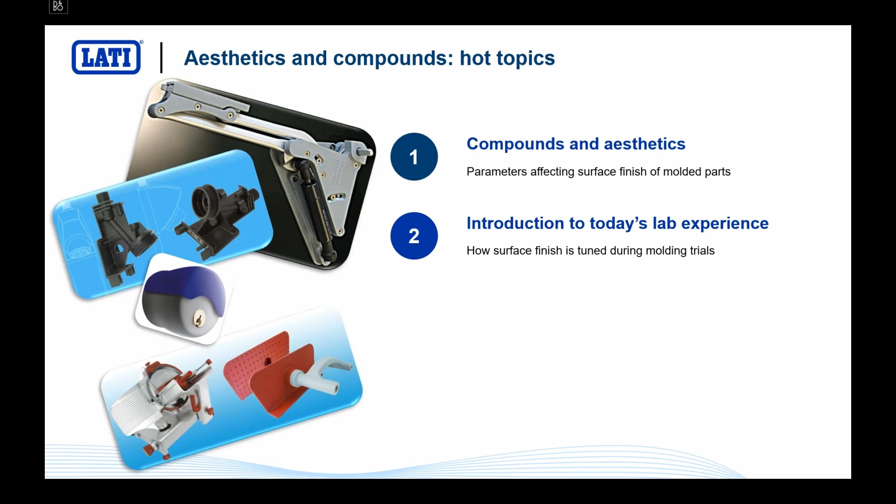How did we develop this very tricky topic? We wanted to create a lab experience and the design of experiment. So we are going to introduce the topic in itself and see what are the parameters affecting the formula and injection molding, and how we will discuss the quality of the surface finish and aesthetics with the molding design of experiment. So we were going to actually play with this topic by fine-tuning some parameters in the formula and in the injection molding process.

We will conclude our webinar with a wrap-up, trying to better understand how it is possible to make technical compounds, injection molding, and all the parameters working in both fields, injection molding and plastic formula.

First of all, we have to try to define what is aesthetic. It turns out that we talk about aesthetics even when we are talking about technical plastics. Technical plastics are normally not conceived for fashionable applications. So why are we talking about aesthetics and technical plastics? Because even when we're working with technical plastics, we are having issues with surface finish and how parts appear. We need to have a perception of a finely working and perfectly working, finely molded part. And it is absolutely very important to keep an eye on the aesthetics and surface finish, even with the most complicated and the most high-performant compound.

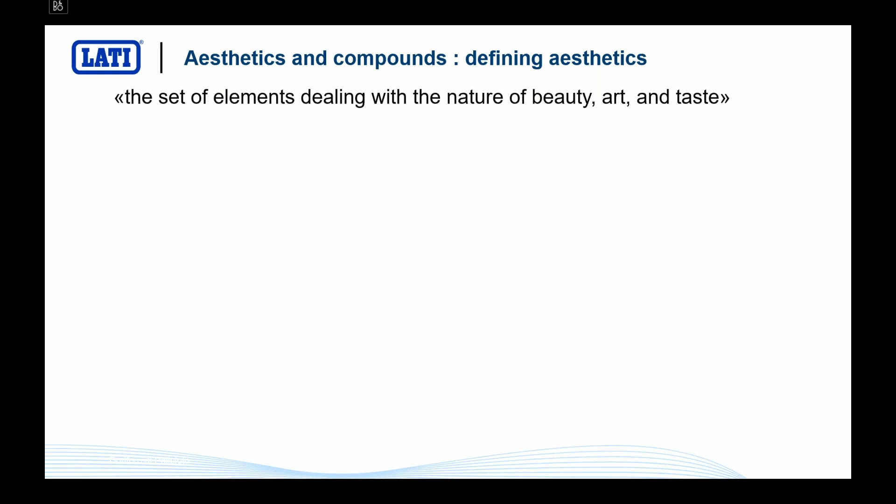So if we want to define aesthetic, it's a bit philosophical, but aesthetics is defined as the set of elements dealing with the nature of beauty, art, and taste. So you read no plastics in this sentence, but beauty, art, and taste.

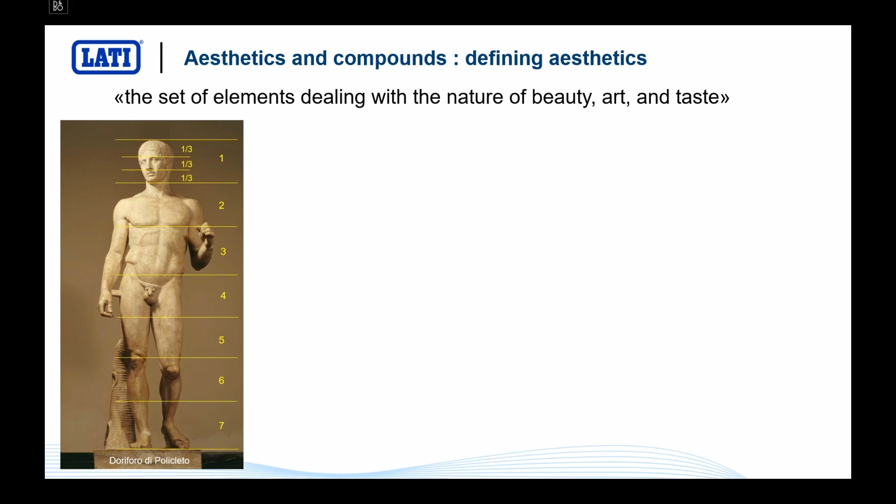I want to play it big, so I introduced this picture of this nice statue. Why did I do this? Because the search for beauty has always been in the mind of man since the early ages of our civilization. Beauty is a very tricky mixture of different perceptions. You see how this statue is actually made out of different materials and the different proportions between the parts of this body. How do we perceive, how do we feel beauty and aesthetics?

First of all, we see it with a visual perception. So we will appreciate a smooth and uniform appearance, just to give you an idea. Or with our tactile perception. For this reason, we will appreciate a smooth feeling on a glossy surface and a rough feeling on a rough surface. And we will not appreciate any roughness on a glossy surface or any glossy area on a rough surface.

Last but not least, we must not forget the olfactory perception. If you have the most beautiful looking piece of engineering, but it smells bad, then you will have a bad perception of that very part.

All these nasty issues with the perception of beauty can be summarized in the plastic part showing up here. You see how this part can be absolutely perfectly performing, can work perfectly great, and injection molded with the most performing technical compound, but it looks bad. It looks poorly molded, it looks full of streaks, the color is not even, the surface is rough and not glossy. You have the perception of a bad looking part, but you also have the perception of a poor and poorly working part. And this must be absolutely avoided when it comes to technical compounds.

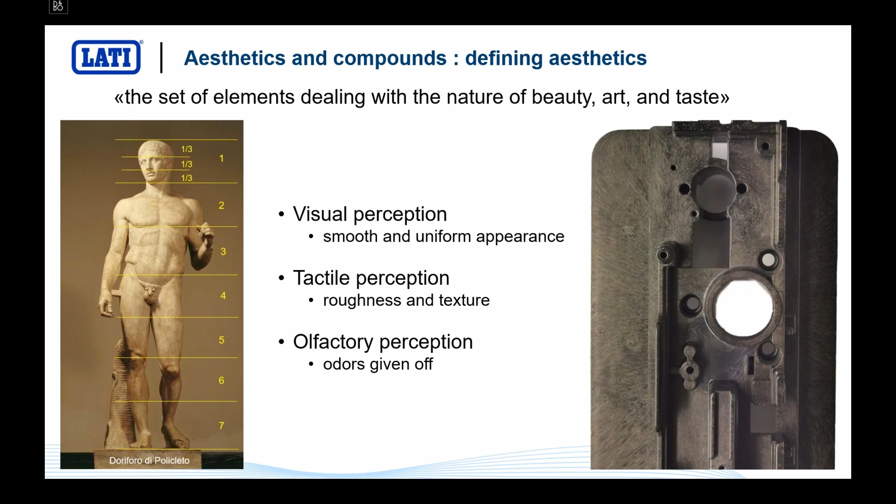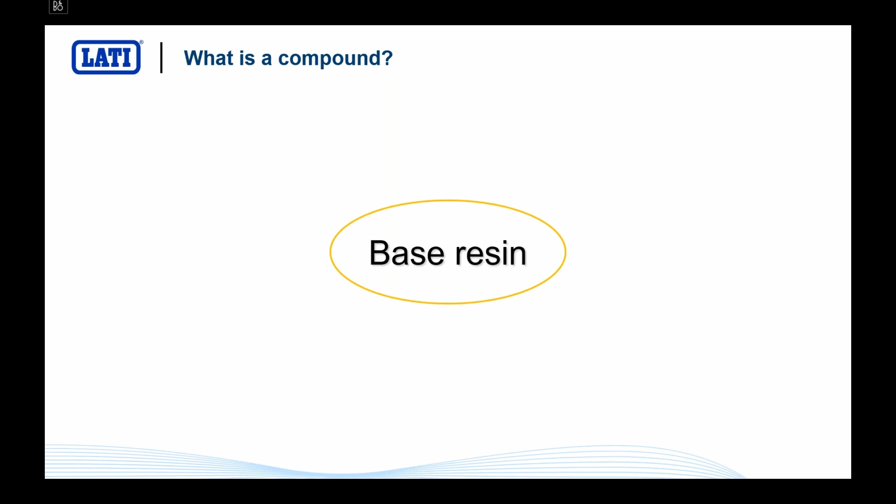Now let's see what is a compound. We have already been talking about this quite a number of times, but it is important to talk about what is a compound even from an aesthetic point of view. A compound is a mixture between a base resin, which is the polymer, which is the plastic in itself actually, and a set of additives that we put into this plastic matrix to achieve some specific performances.

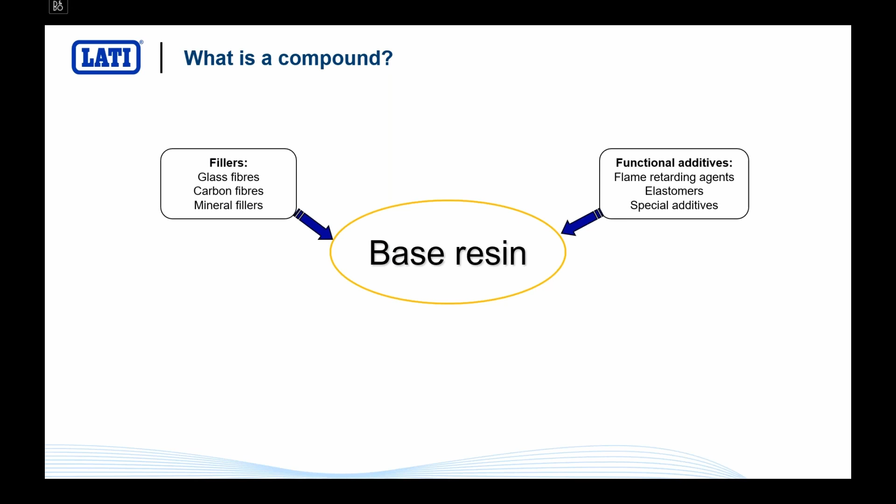First of all, functional additives, talking about flame retarding agents or self-lubricant agents or thermally conductive agents and so on. Then you have fillers providing dimensional stability and mechanical properties like glass fibers, carbon fibers, mineral fillers, and we will see some of them during this webinar.

Then you have plenty of processing aids. Compounding, extrusion, calendering, and injection molding are extremely demanding processes requiring a lot of processing aids as lubricants, stabilizers, nucleating agents, detaching agents, and you name it. We put plenty of these into our compounds to have a perfectly working plastic.

Then you have stabilizers of any kind. Heat stabilizers, chemical stabilizers, UV stabilizers, thermal stabilizers, you name it. And then, of course, you have pigments and everything providing a good-looking aspect to our plastic.

Colorants, pigments, laser marking additives, printing aids, and so on. When it comes to aesthetics, it's important to keep in mind that each one of these will provide its contribution to the final surface finish of our injection molding part. We have to look for a compromise between performance and surface finish.

Today we are going to have a chat about the effects of different base resins, of different fillers such as mineral fillers and glass fibers. This is the topic that we are going to discuss today.

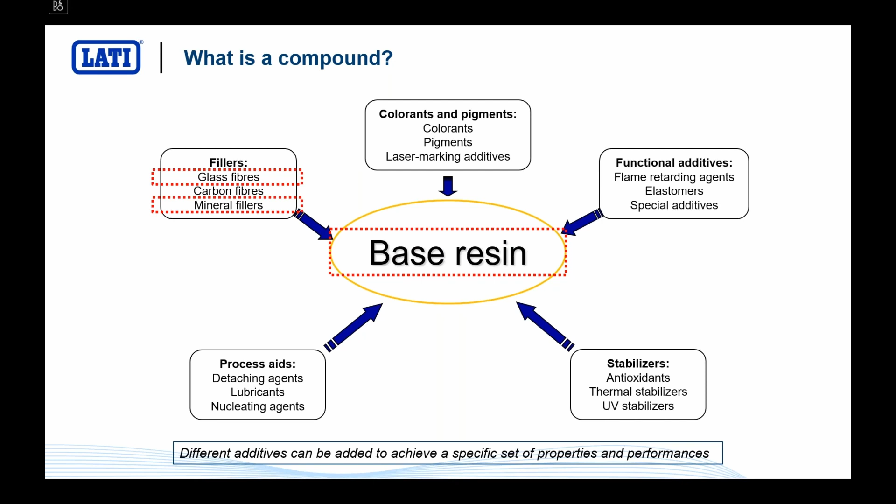We have seen the compound, but what else is also affecting aesthetics in an injection molded piece of plastic? Of course, it's a very complicated process. Even the injection molding process will provide some effects to the surface finish and to the aesthetic quality of our part. First of all, the barrel temperature.

The barrel is where you keep your melt material in the injection molding machine. Then you have the mold temperature, which is the temperature of the tool where you inject your plastic to create your manufactured parts. And then you have the injection speed, which is the speed used to inject melt plastic into the tool. These three parameters are extremely important to achieve the aesthetic level we want to achieve.

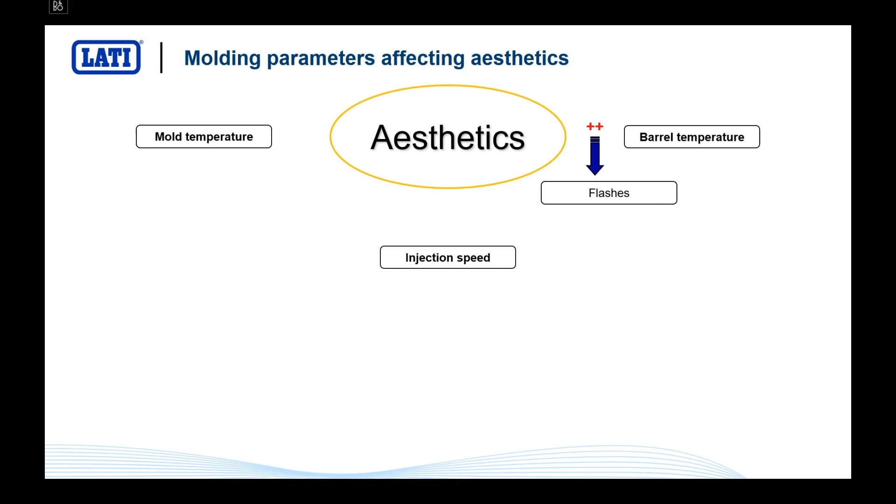What happens if the temperature of the barrel is too high? If the temperature is too high, we will have flashes. It means the plastic will be too liquid and will just be squeezed between the two halves of the tool, or you can actually destroy the material itself.

If the barrel temperature is too low, you run the risk of having a short shot, which is a not completely filled part. And it's absolutely a no-no. You do not want to deal with that.

What happens if you have too high mold temperature? Bad issues. You will have the part sticking to the tool. It will be almost impossible to detach it, even because the shrinkage will be higher and the part will be completely glued to your tool, and you will have issues. Of course, you will have a longer molding cycle because it will take a lot of time to cool down, and that is a problem.

If the mold temperature is low, you have a short shot as well. You can have releasing issues as well, and you can also have other aesthetic issues that we are going to find out during this webinar.

If injection speed is too high, you can run the risk of having flashes, overpacking, or burnt marks. What does injection speed mean? It is the speed that you apply to your melt plastic to fill the cavity. When you apply a high speed, you are also applying very high shear stresses to the polymer, which can actually be destroyed by these stresses.

It becomes more fluid, it can create some gases, you have very bad mechanical performance of the part itself, and you will have an absolutely poorly performing and very bad looking part. So you want to stay away from too high injection speed.

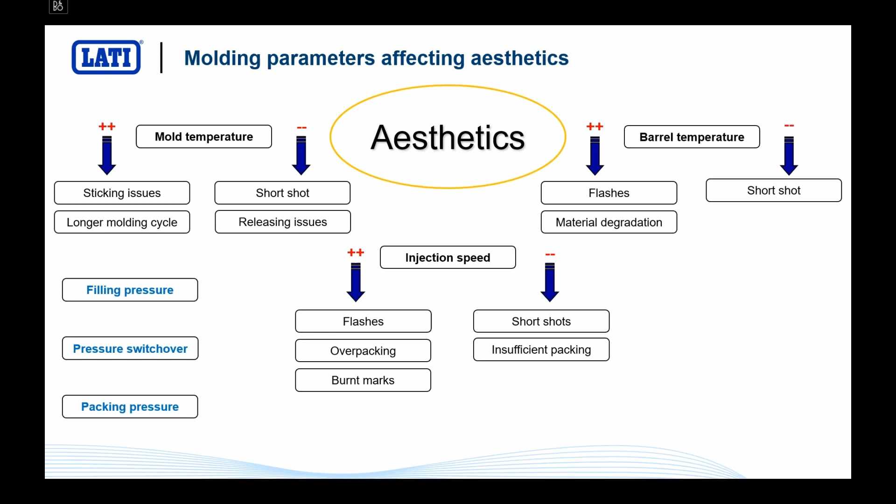The design of experiment that we are going to see today is designed to achieve the best looking, the best aesthetics.

Some other parameters affecting aesthetics: of course, you have injection location and the type of injection. The injection is the part of your molding equipment where material flows through to fill the cavity. It is very important, the place where you put it in your geometry and the shape of your injection system.

Ejector location. Ejectors are the pins used to push the molded part out of the tool. It's very important where you put them because they can leave a sign on the freshly injection molded part.

The color shade is extremely important. We will see that our eyes perceive aesthetics in a completely different way depending on the color of the part itself. Our eyes are extremely sensitive to any kind of defect on dark colors, and more tolerant on light colors or chroma colors like deep blue or deep red. So dark shades are a bad issue when it comes to aesthetics, because even the smallest defect will be immediately detected by our eyes.

Last but not least, the texture. A glossy surface can be extremely difficult to achieve if you want a perfectly looking part, but some coarse or matte surfaces can be tricky as well, especially extremely fine matte surfaces. In that case, even the slightest scratch can really look terrible.

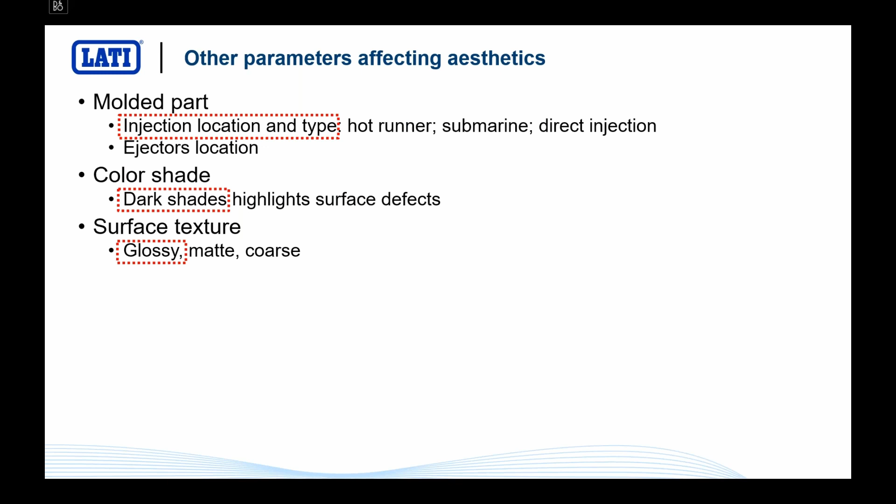We are going to focus our attention on the injection location and type. We will see two different injection setups, only on black parts, because black color is the toughest when it comes to aesthetics and surface finish, and glossy parts, because glossy and dark is the hardest combination when you want to discuss aesthetics and surface finish. Just to give you an idea, I put these two parts below here.

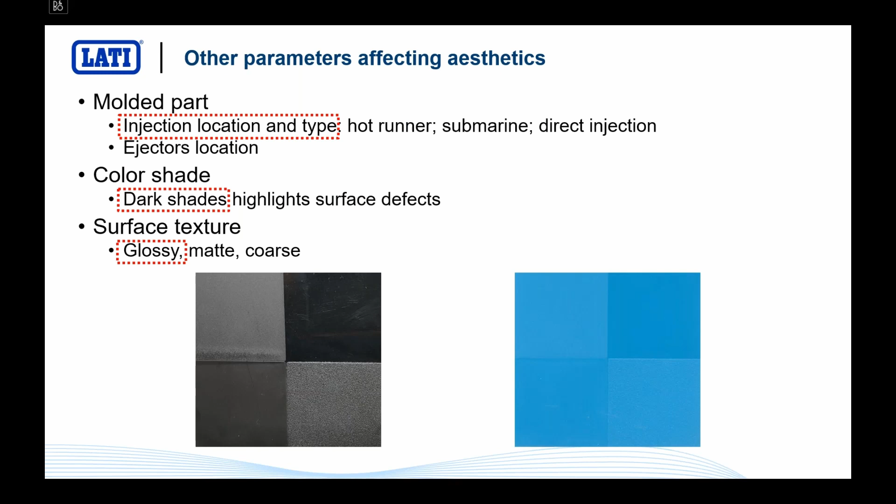They are exactly the same geometry, molded with the same material but with two different colors, and you can perceive how different our sensation is when it comes to color, beauty, and aesthetics. The part on the right seems perfect, the part on the left looks awful, but it's the same material, the same tool, the same injection condition. It is just a different color. So you can easily understand how hard it is to achieve a perfectly looking part.

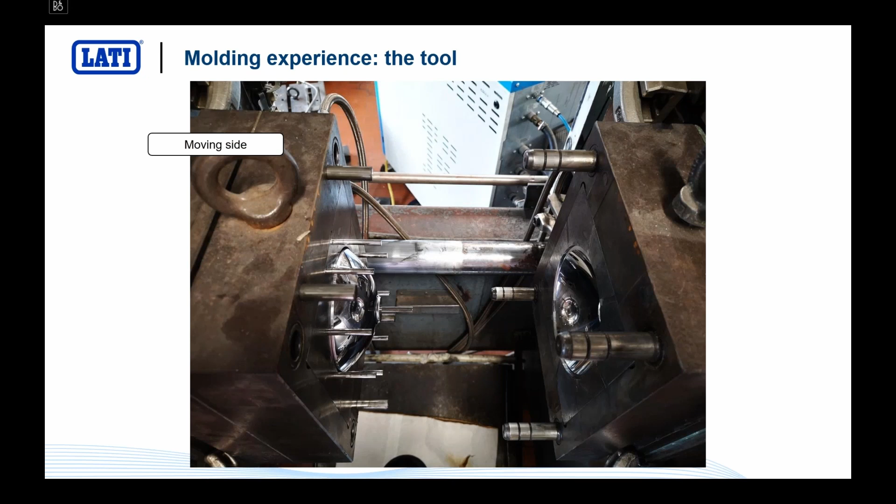Let's talk about the tool that we are going to work with today. It's a kind of bowl, a semi-spherical bowl with a perfectly polished surface. It's a glossy surface. You have the moving side on the left where you put all the ejectors, and you have the fixed side.

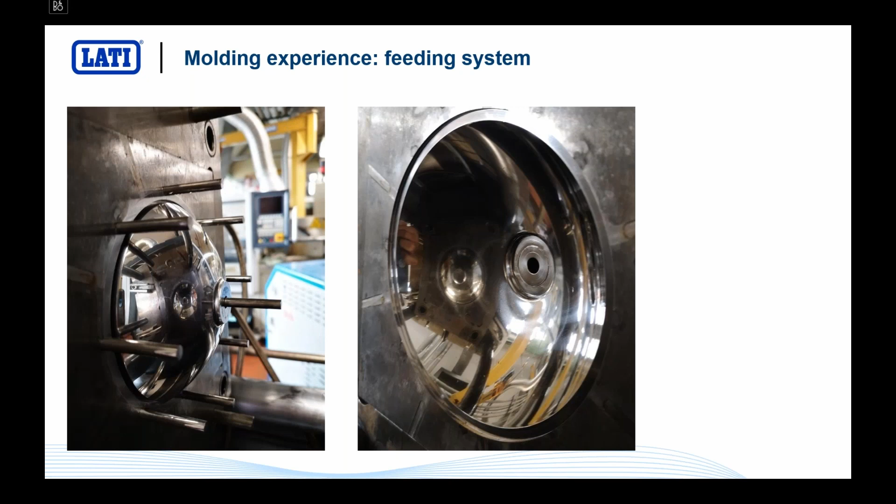Of course, you have two types of injection, as I already said. The first injection type is a fan gate, placed on top of the semi-spherical bowl. The second one is a submarine gate, a 3-gate submarine nozzle. We just change the nozzle and we can simulate the effects of a fan gate and a 3-gate submarine gate. You will see how effective a proper selection of the best injection location and injection type can be.

Now let's start from the very beginning. Let's see how the part can be filled by using a finite element simulation. What you see here is a mold flow simulation. You can see how even the filling path is when it comes to filling this bowl with a fan gate. Everything runs smooth, there are no weld lines, the part is filled like a charm, everything looks perfect.

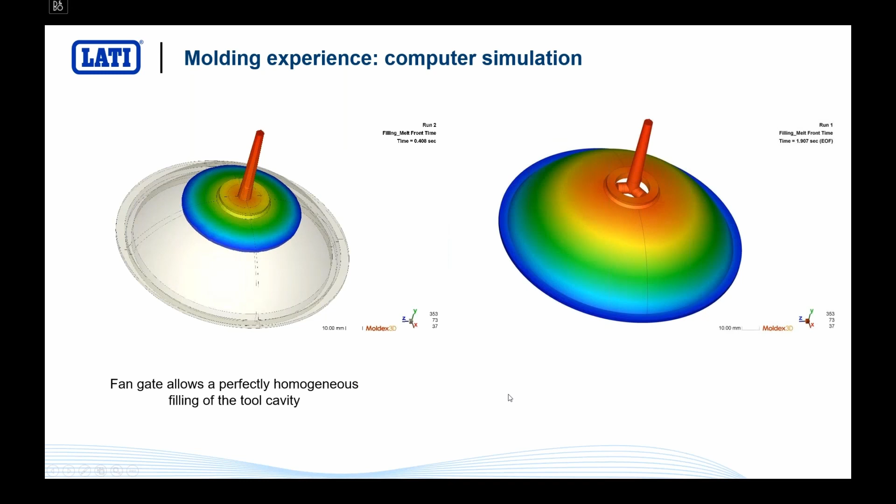Now I want to focus your attention on what happens when you use a 3-gate submarine injection system. Let's put it here, you see what happens in this situation. You can see how the three flows weld in one specific location. This will lead to a specific fiber orientation and will lead to weld lines. Weld lines are a major issue when it comes to the surface finish and the aesthetic quality of your part, because we will see how bad weld lines can look.

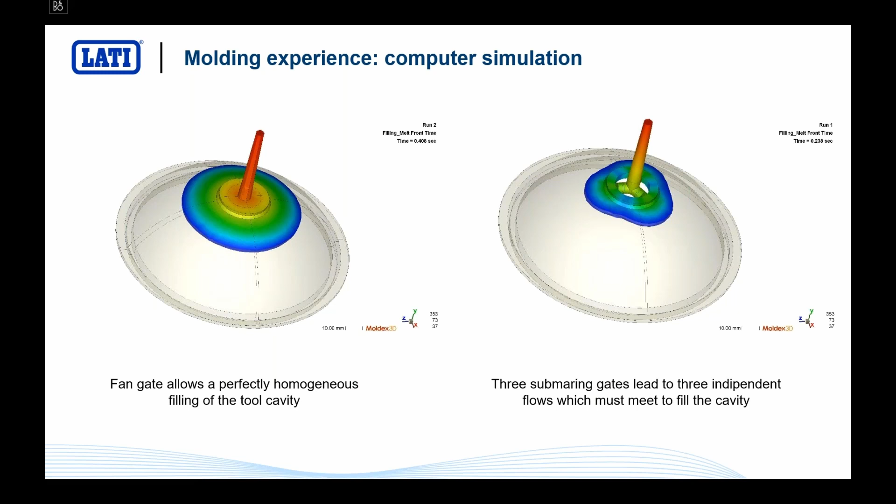So since the very beginning, we see that a 3-gate submarine injection system and a fan gate injection system can perform very differently. The submarine gate, with multiple gate locations, will lead to a lot of weld lines, and the number of weld lines is even higher if your part is not simple like this one, but has holes and other features. Each time your melt flow must turn around a hole, you will have weld lines. So pay attention to weld lines and to the way your part is injected and filled.

Now we have seen the tool, we have seen the injection that we have selected, we have seen the geometry that we have selected. Let's take a look at the materials that we are going to play with this afternoon. So the first material is a polyamide 6 with 35% mineral filler.

We will see what's the meaning of mineral filler. We will play with 3 different mineral fillers, and we will see how different the effect is, even if the formula is exactly the same on paper.

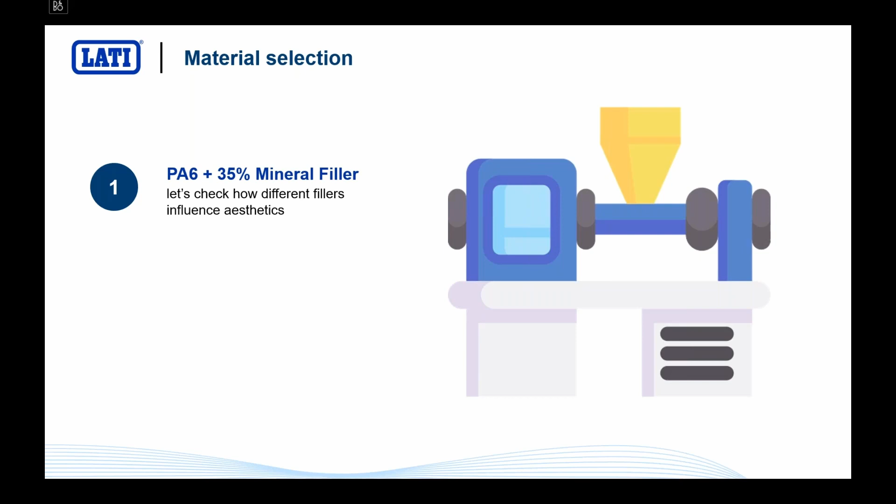The second one is a typical metal replacement plastic, polyamide 6,6 with 50% glass fiber. It's a super performer, with outstanding mechanical performance, very tough, very resistant, very dimensionally stable, but very tricky when it comes to aesthetics and quality of the surface finish.

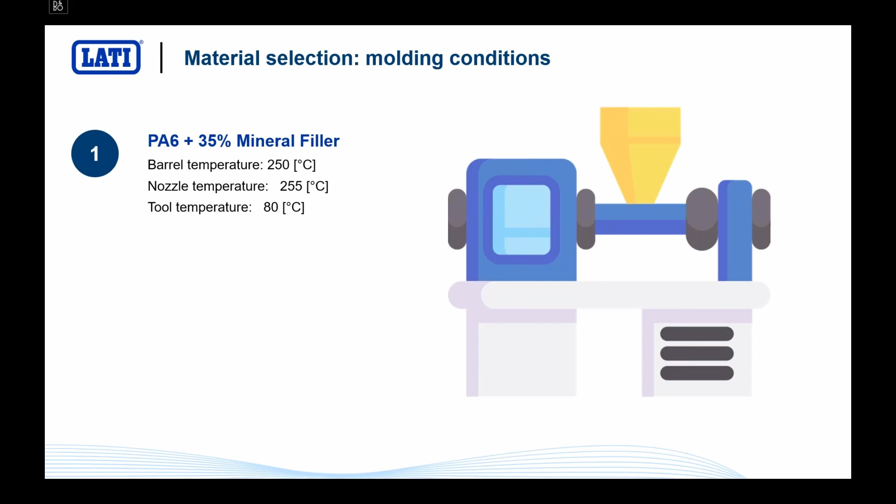Let's see the molding conditions we have set up on our injection machine for our design of experiment. For the polyamide 6 with 35% mineral filler, we selected 250 degrees C for the barrel temperature, 255 for the nozzle, and 80 degrees C for the tool temperature. Very typical injection molding condition. We will keep the same molding condition for all materials tested this afternoon.

Then we have polyamide 6,6 with 50% glass fiber. In this case, the molding conditions are exactly the same we use on this kind of polyamide 6,6: 280, 285 for the barrel and nozzle, and a tool temperature of 80 degrees C.

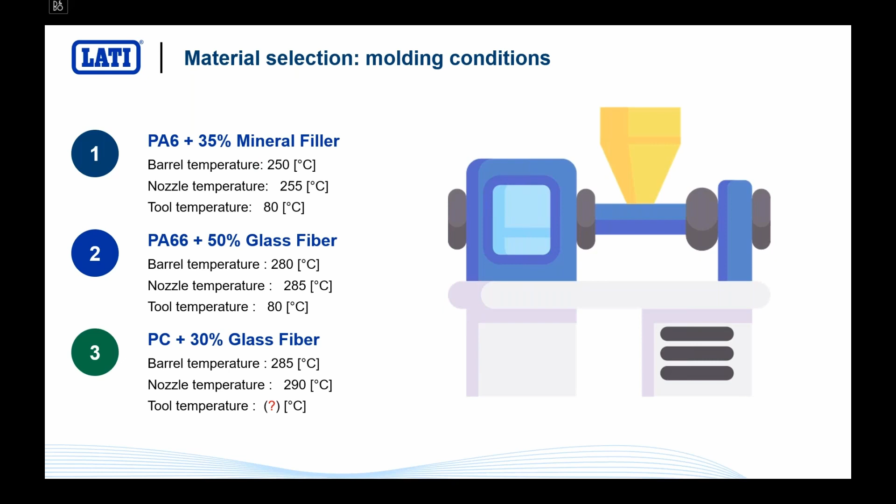For polycarbonate, we wanted to keep a bit open when it comes to the tool temperature, for a reason we are going to find out during the last design of experiment. All the rest is typical. This is the typical setup for amorphous polycarbonate.

Now let's jump into the design of experiment, and let's see how the surface finish is affected by the parameters we have seen: injection location, injection type, different formula, different injection speed, and different tool temperature.

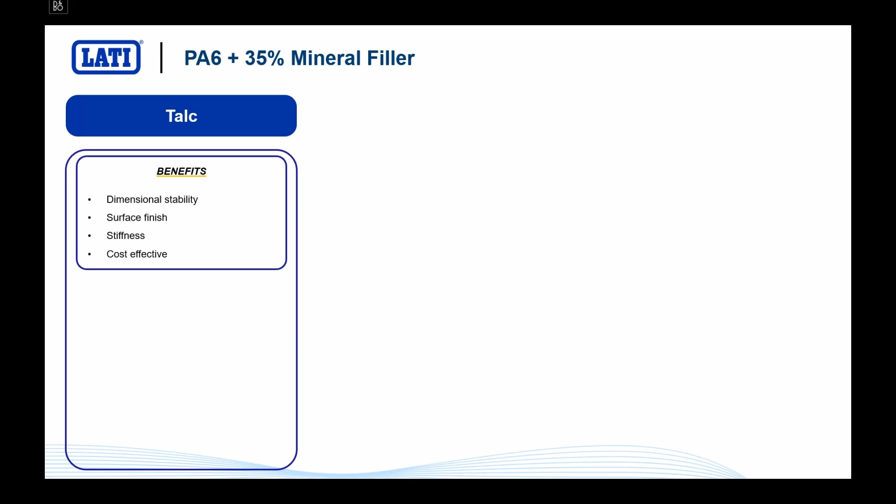First of all, let's focus on what is a mineral filler. We have tested 3 different mineral fillers. Talc is a typical mineral filler, providing normally outstanding surface finish and outstanding dimensional stability. As with all mineral fillers, the drawbacks concern impact resistance - they are not great performers.

Then we have Wollastonite. Wollastonite is a very glass-fiber-looking mineral filler, so you have outstanding mechanical properties. Wollastonite looks like spikes, so it actually performs a bit like glass fibers, and it's very hard as a drawback, so it can actually create some wear on your equipment.

The last mineral filler we are going to talk about is kaolin. Kaolin is a cheap mineral filler, which is very interesting from a mechanical and chemical point of view, but it is quite hard and difficult to properly disperse in your compound. We are going to see some issues related to the dispersion of kaolin in our design of experiment. So these three are the mineral fillers we are going to check with this polyamide 6.

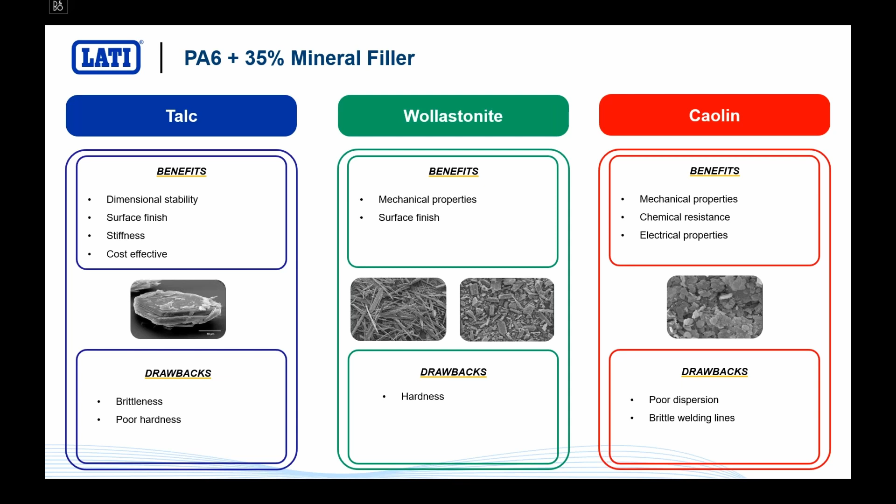Let's see what happens. Let's start from the very beginning - first material, polyamide 6 with 35% talc, injected with 3 different speeds. First of all, with the fan gate. So with the fan gate, our bowl will look dull using a low injection speed.

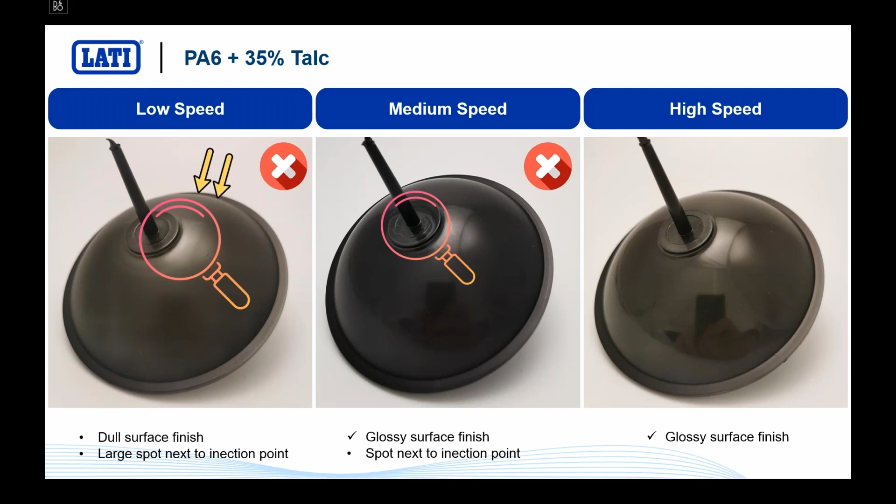You can improve your aesthetic and surface finish by increasing speed, and you can achieve a very good, excellent result on our polyamide 6 35% talc by using high speed. You see how different the gloss of the surface is.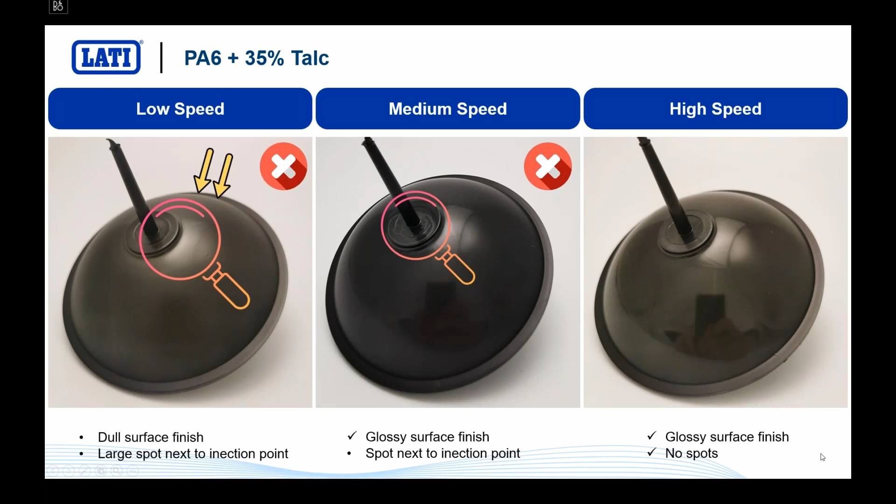On the picture at left, you see nothing. On the picture at right, you can even see the hands of our technician and his cell phone taking a picture, just to better understand how glossy and reflective this surface is, just by working on injection speed. This is an extremely interesting and really outstanding result, I would say.

Now let's see what happens on the other side. We have seen it on the curved side. Let's see what happens below.

The same stuff, you see the same trend. So you have a very bad looking nasty spot below, which is looking even worse at medium speed, but it will completely disappear by increasing the speed. So with the same material, with the same geometry, with the same tool setup, you can actually achieve a perfectly looking surface finish just by working on the injection speed, moving from a low speed to a high speed.

High speed means higher temperature of the melt. This is something you must not forget. Speed is always related with stresses, and stresses are always related with temperature. Temperature increases as stresses increase.

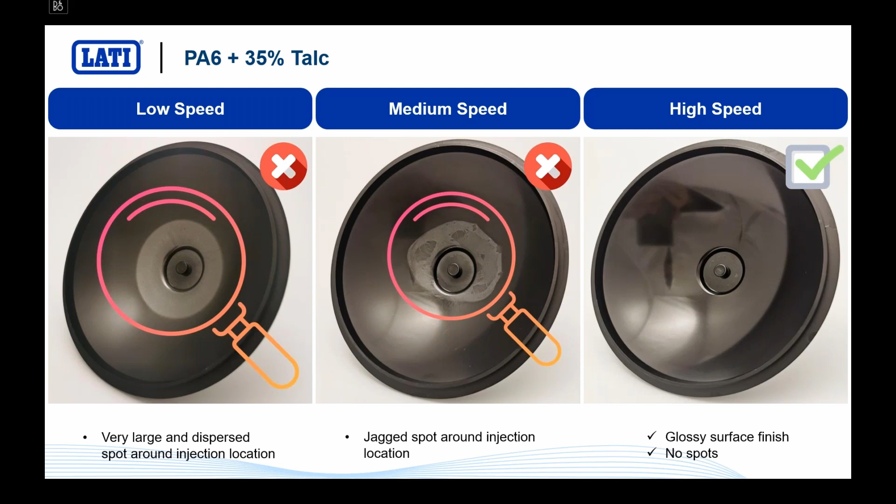Now let's see what happens if we swap the injection system and put in place the 3-gate submarine. Remember, this is a design of experiment, so we want to perfectly understand the role of each factor that we are going to tune in our equipment.

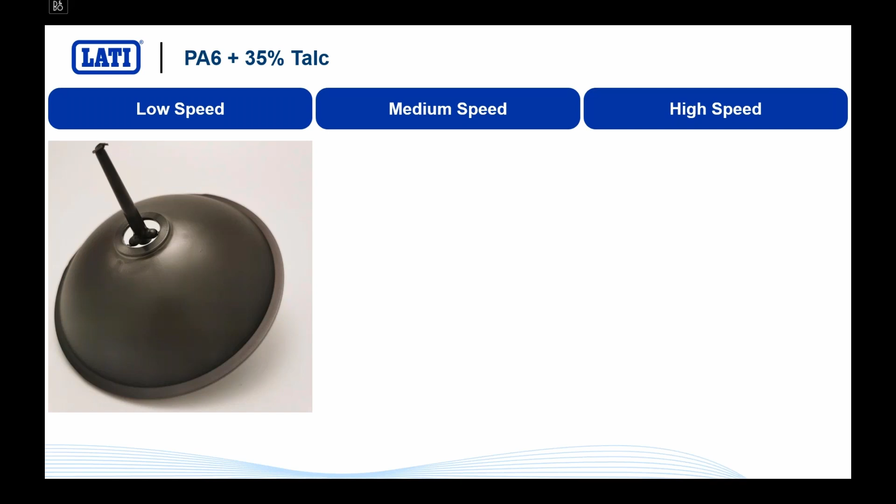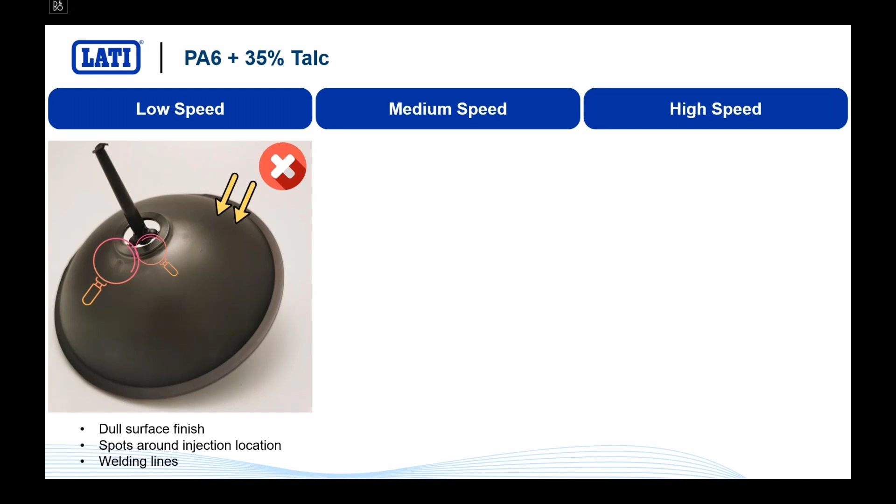If we apply a 3-gate submarine injection system, you will see that the surface is always dull, so you have always a very opaque surface, but around the injection location there is something different popping up. There are some kind of spots, something you have not seen before. You have some kind of lighter areas, and you see the weld lines, those lighter, more glossy surfaces evidenced by the small lens. That's a weld line, and weld lines can be extremely nasty. They can look really, really bad.

If we increase the speed, you can have a much better looking surface, but you always have evident spots around the injection location, just like the case before. The situation is perfectly solved if you increase speed—well, you have an improvement, but you still have some kind of weld lines. So pay attention to weld lines when it comes to different injection locations.

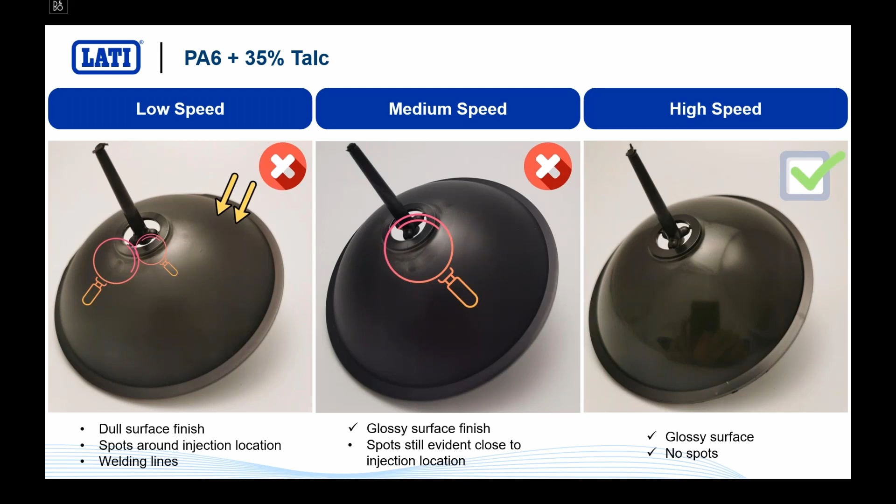Let's see the same from below. Also in this case, you see the same trend. You see a much worse looking surface, which becomes dramatic in the case of a medium injection speed, and they disappear, or more or less disappear, when it comes to higher speed. But please look how you still have some kind of sign here, and here, and here. So something is different between the fan gate and the 3-gate submarine. Pay attention, because this is absolutely something to keep in mind. Anyhow, the situation has been vastly improved by increasing the speed.

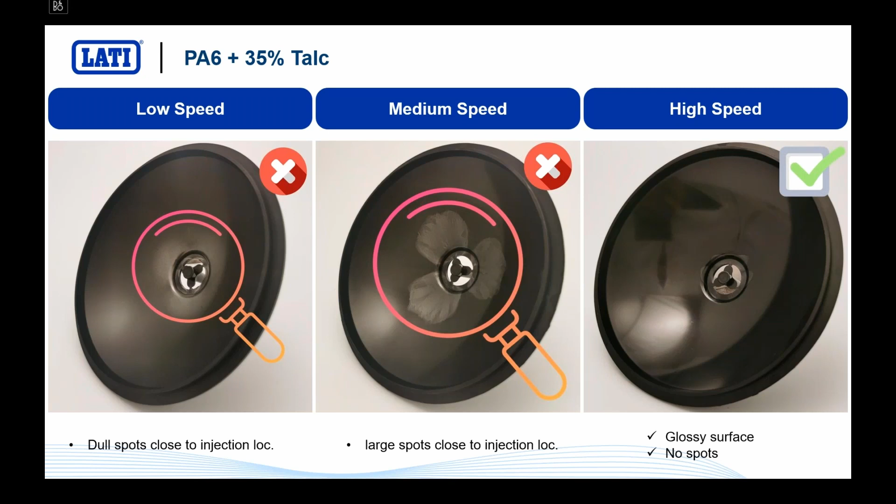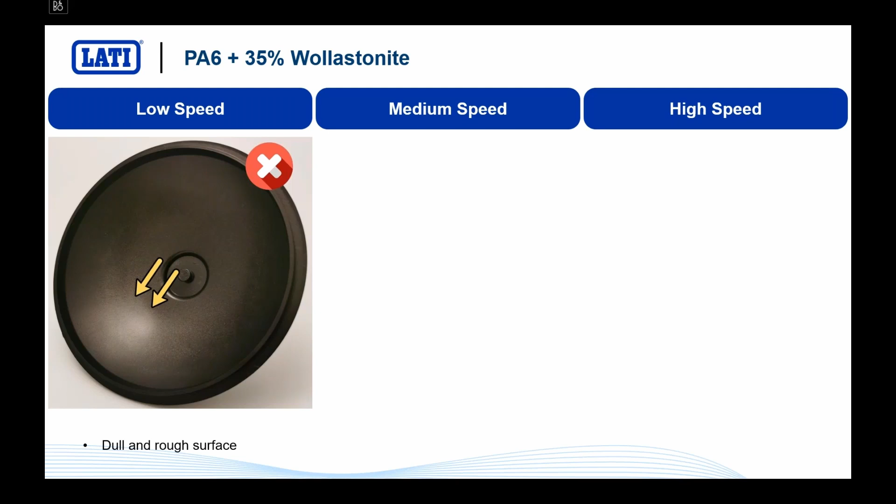Let's change the mineral filler. Now, what happens if we move to wollastonite? Wollastonite is a completely different filler. As you've seen, it seems a bit like mineral glass fibers. The quality of the surface is terrible. At low speed, you have a very dull and rough surface. It's actually very coarse, you can really feel it under your fingertips. It's really terrible, with the same speed as the talc you have seen before.

If we increase speed, you have an improvement, of course. But if you increase your speed too much, what happens is that you have flashes, because you have somehow increased the speed too much. The material became too liquid and was squeezed between the two halves of the tool. Flashes are a main issue, not only from a surface finish point of view, but also from a technical point of view, because you have to deflash your part. Otherwise it will be impossible to sell and to use it. Deflashing can take an overwhelming amount of time, and you want to stay away from flashes.

Please keep this in mind, especially when it comes to very fluid materials like liquid crystals or PPS. Especially PPS is a material which is very prone to flashes. So pay attention if you want a perfectly looking part made out of PPS, like 40% glass fiber filled PPS, because if you increase the speed or temperature too much, you will have tons of flashes, which is a terrible issue.

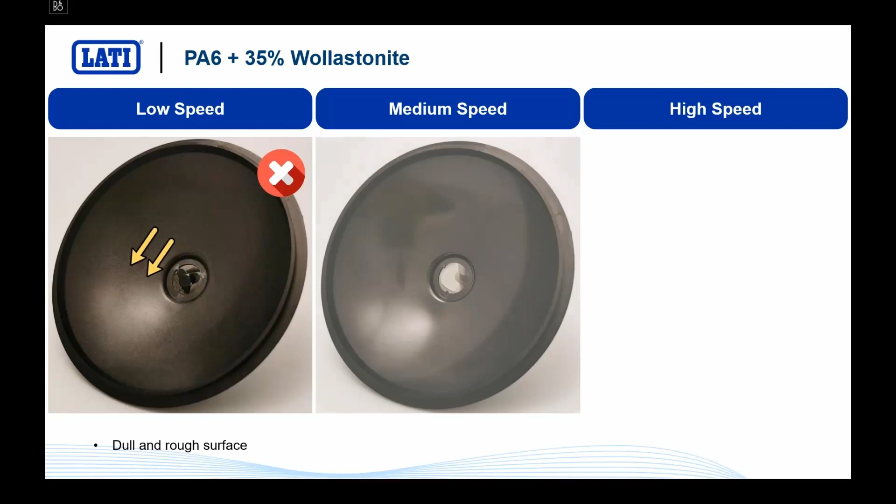We have the same situation here, but with the submarine gate. You always have a very dull and rough surface, which is somehow improved by increasing the speed. And if you increase the speed too much, you do not see that kind of issue you saw before—you do not see the flashes, because this specific injection system will somehow reduce the speed of the material filling the cavity. So you also reduce the applied pressure, and you will have an overall good looking part, also with wollastonite. So the trick here is to increase the speed while keeping under control the speed of the melt into the cavity and the applied pressure, by using a properly designed injection system.

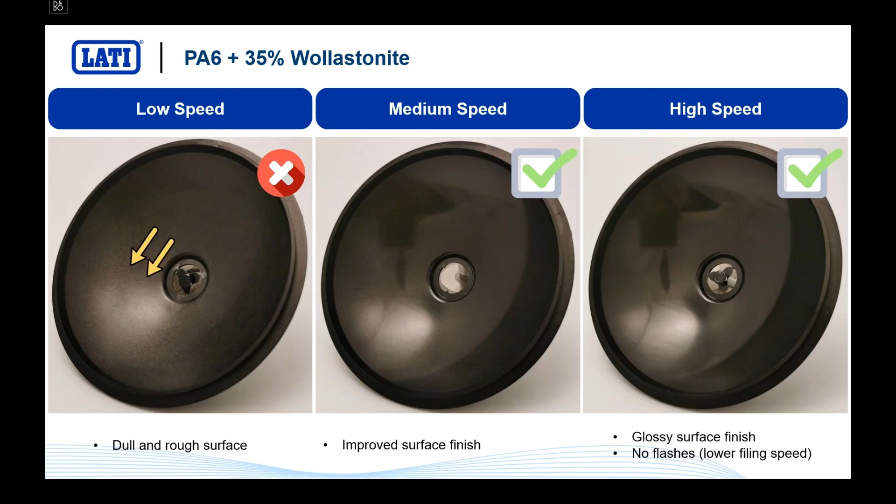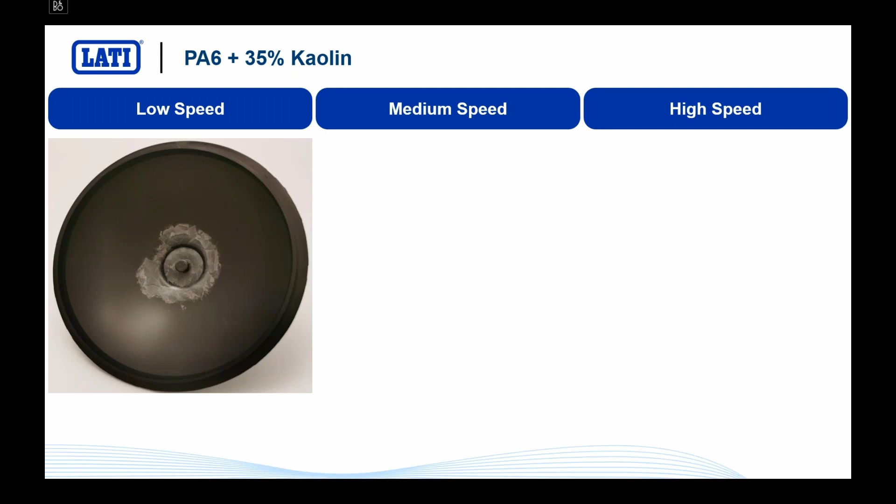The last filler, kaolin. Kaolin, as I told you before, is a nice filler, but it is quite difficult to properly disperse into the matrix. So it somehow pops out of the matrix, and it can create a lot of issues.

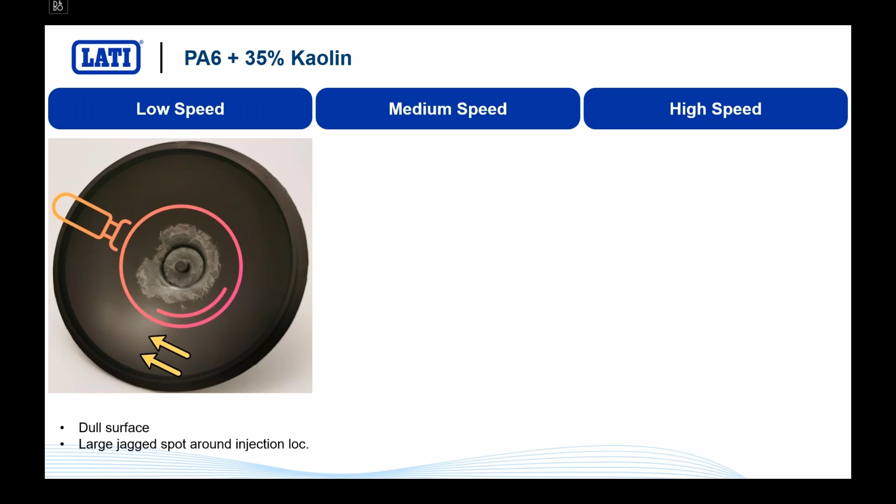You see the surface here with low speed is dull. You have a very bad looking spot around the fan gate. The situation is of course somehow improved around the edges by increasing the speed, but you can see how it got worse, extremely worse, close to the injection location. You have a very bad looking spot and a dull surface as well.

If you increase speed, you have some kind of improvement, but you cannot actually say that you are satisfied with your design of experiment. You still have a bad looking part. So the question is, are we going to surrender to the poor dispersion of kaolin?

No, sir, because you remember that this is a design of experiment, so we still have a very important parameter to tune, which is the tool temperature. And we will see how it works in the next slide.

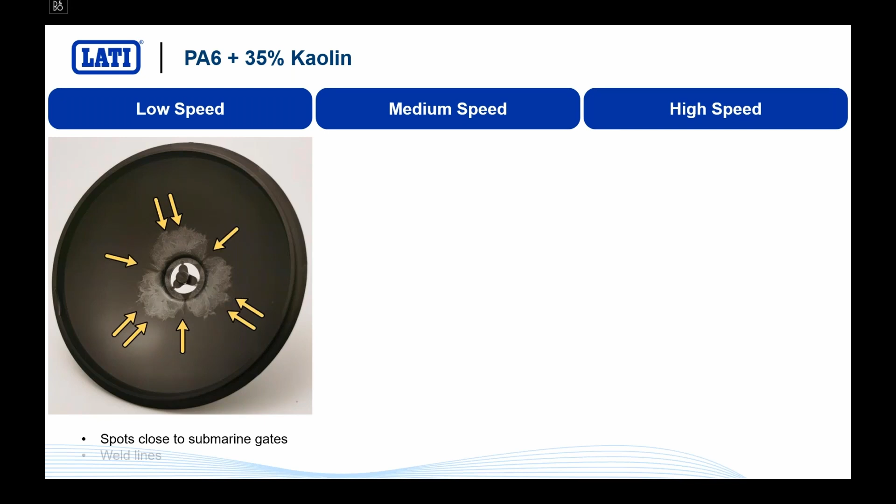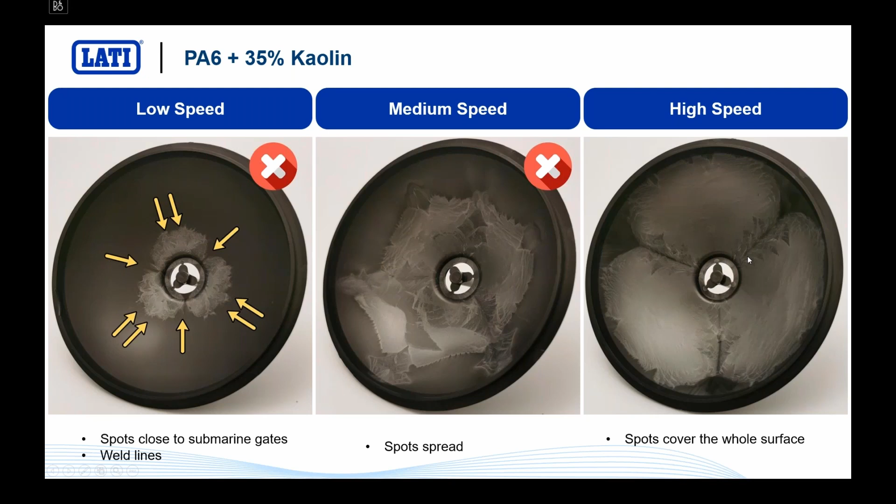This slide is just to focus your attention on the fact that by using a 3-gate injection location, you still have the same problem. I mean, it is even worse, because you do not have only very bad looking spots and a dull and very opaque surface, but you also have terrible weld lines. You can see how evident they are here. Even at high speed, you have the most terrible weld lines and a totally unacceptable surface finish.

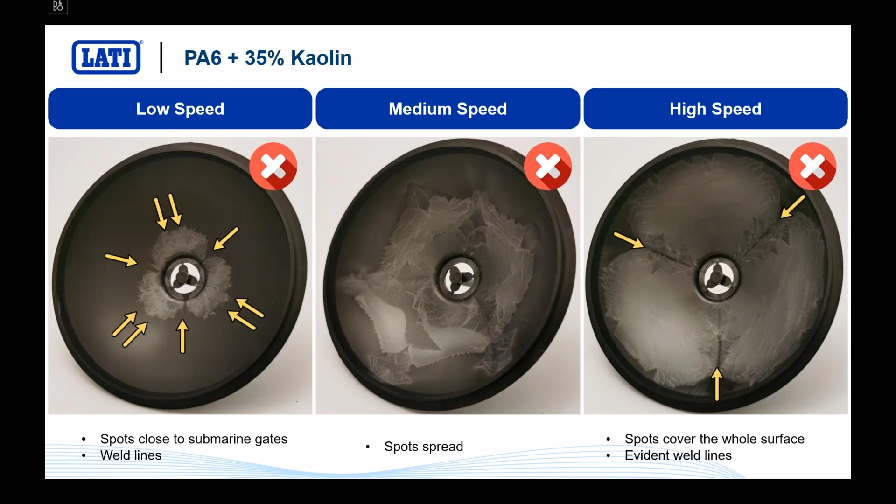Let's see what happens if we work a little bit with our tool temperature. Let's raise the temperature of the tool just by 10 degrees C. Remember, we fixed the temperature of the tool at 80 degrees C. We just moved it from 80 to 90, so it's just 10 degrees C more.

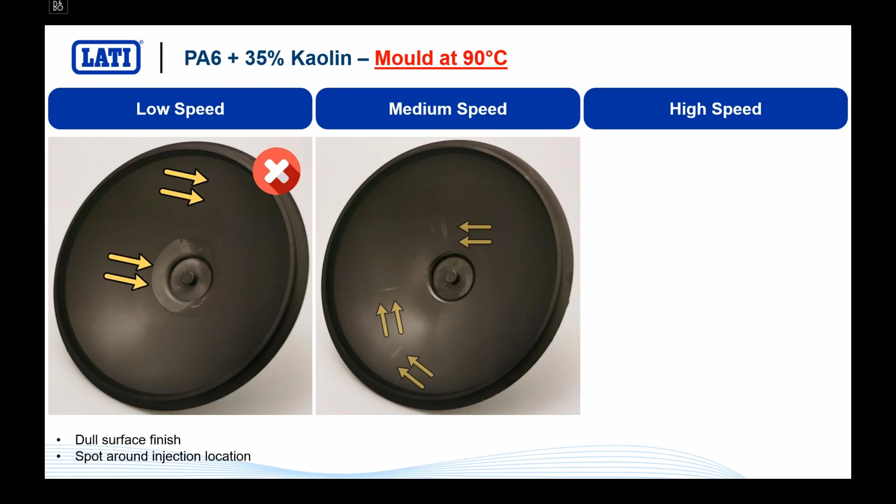You can really appreciate how the situation will somehow be solved by helping the material to properly flow and to properly disperse the filler. You see an improvement here. You can still see some streaks here and there, some kind of stains here and there, but the situation will be, I would say, acceptable. It's not perfect, but it is absolutely acceptable when it comes to high speed and high temperature.

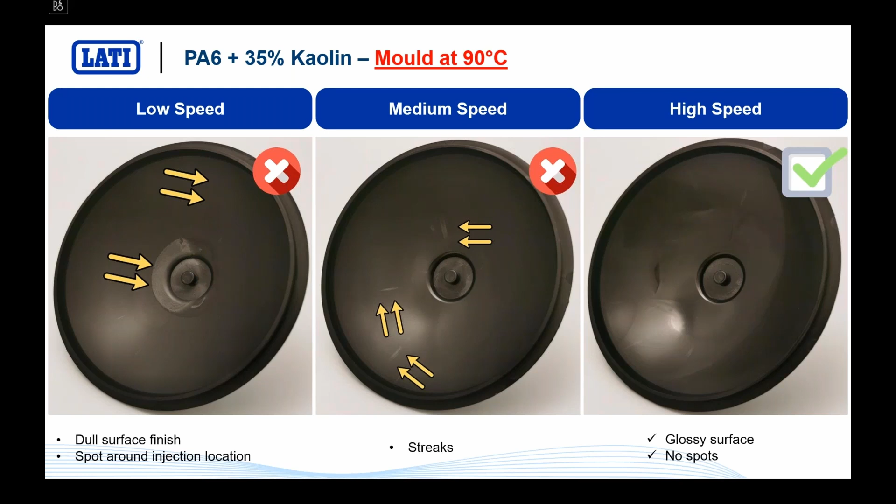So remember that to properly work on the surface finish of your part, you can work with the mold temperature as well as the injection speed. In this very case, we wanted to play a little bit with the tool temperature, and it is evident how it was possible to improve the surface finish even of the worst guy of all, which is kaolin.

Now let's talk about the same design of experiment, but with a very, very, very popular plastic, which is polyamide-66 50% glass fiber. Typical metal replacement plastic, structural, high performance. It's very popular, used since the 80s, since the 70s. So it's a very long story.

Today we have plenty of different variations on this formula. We have self-lubricant, flame retardant. You can see on the market plenty of offerings. There is a lot to offer. Glass fibers are molten glass, which is spun into very, very thin fibers, which are chopped as chopped strands.

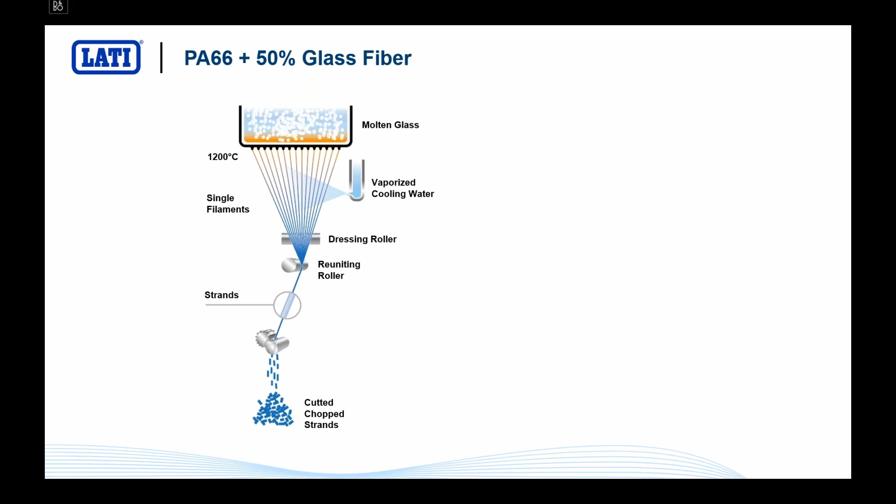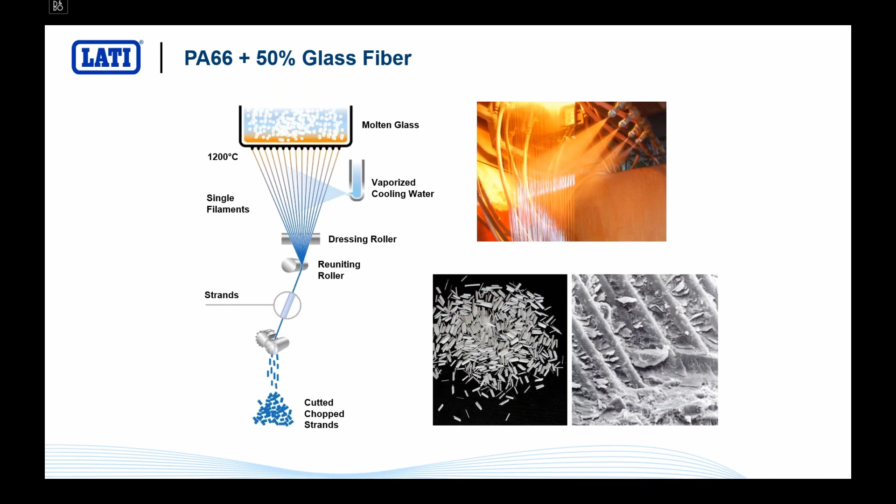These chopped strands are dispersed into the matrix, but it is not so easy to disperse it. And more than everything, they will provide a very bad looking surface on ordinary injection molding general purpose polyamide-66 50% glass. Let's see what is the difference in the surface finish, so in the aesthetic of your part, by using an ordinary general purpose polyamide-66 50% glass and another formula which has been tuned from a matrix point of view in order to boost, to increase, to improve the quality of the surface finish.

Remember, this is a design of experiment, so we are allowed to tune all the parameters of the tool, of the injection system, of the injection parameters, and the material itself. So in this very case, we start with two different formulas.

This is the typical surface finish of a 50% glass fiber general purpose material, the kind you can use for more or less everything. Low speed with a submarine gate. The surface is the worst you can actually imagine.

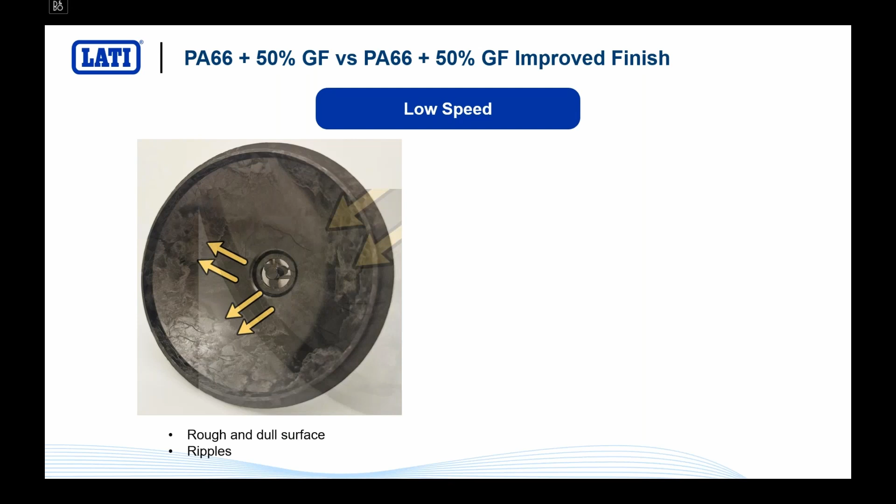This kind of surface will not only give the idea of a bad looking part, but also a poorly performing one, because you have a lot of wrinkles and ripples, which can be perceived as cracks or defects. Nobody will ever want to deal with such a plastic part, and you need to solve this surface finish issue before releasing your part on the market.

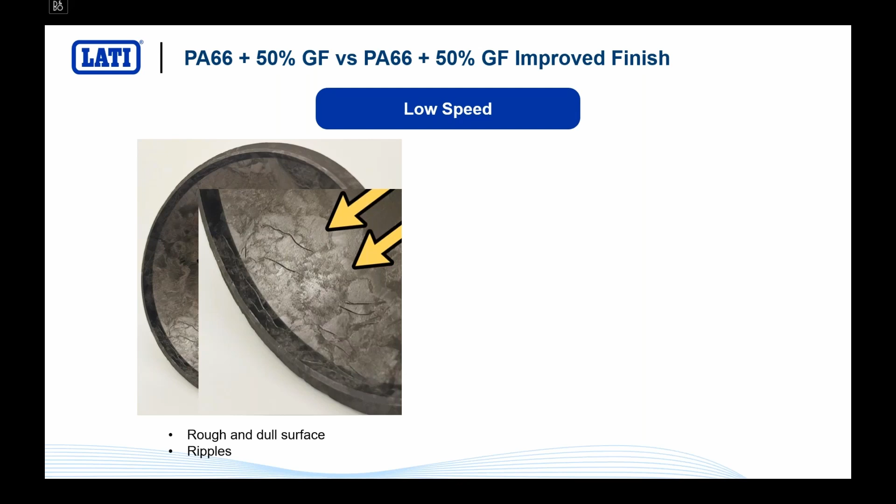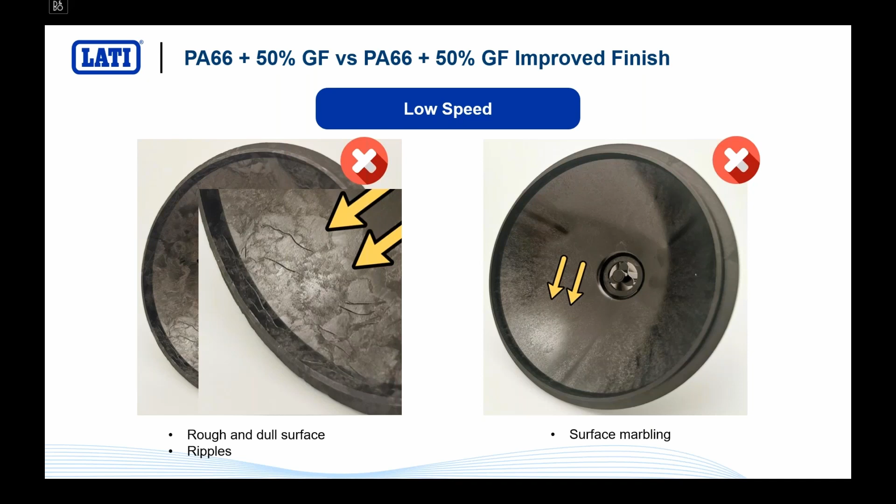The same happens in the case of the fan gate, because the problem is not only the injection location, it's in the formula itself, in the speed, in the process, and so on. You have some roughness and some spots. The same is observed on the improved finish proposal. You still have some very poor surface.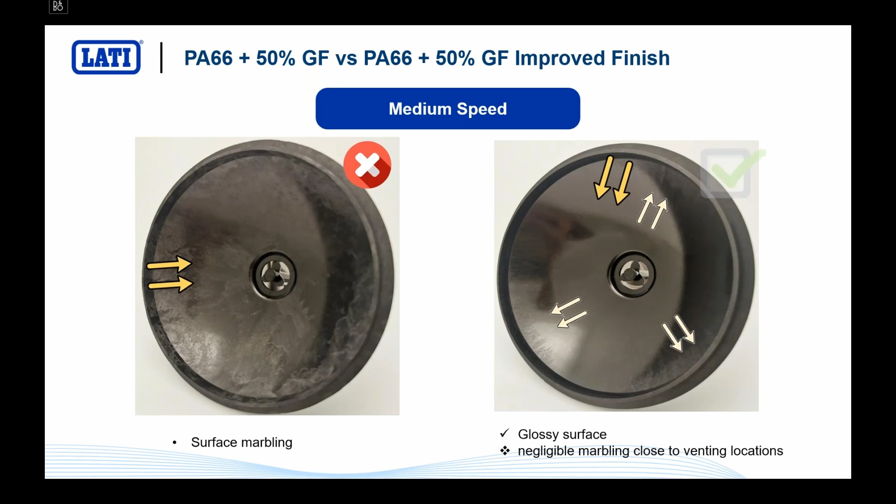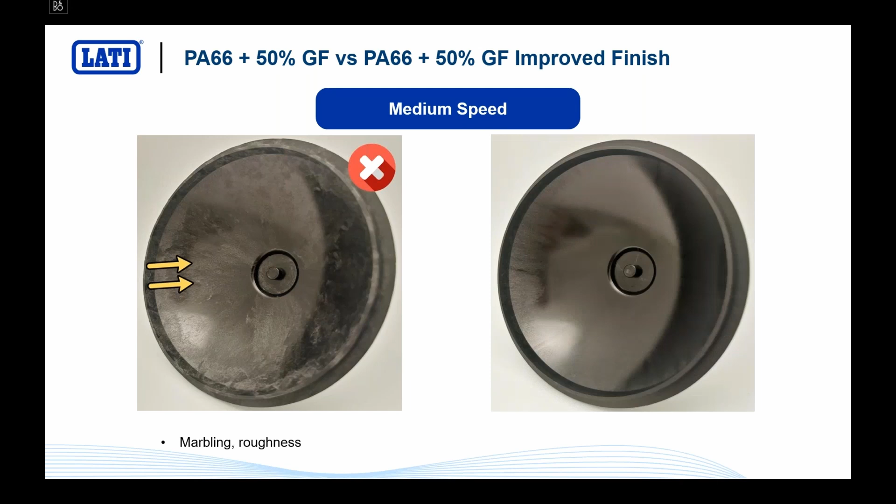It's not still perfect, but it is somehow improved. We still have some flashes and streaks here and there, but this part is more or less acceptable. The same is achieved on the fan gate, with some improvement also in this case. Not looking as good as the previous solution, but it is somehow more acceptable.

So what we see here is that you can achieve a good looking part keeping the same injection location and the same molding condition, just tuning the material formula, which is one of the parameters we are somehow allowed to adjust.

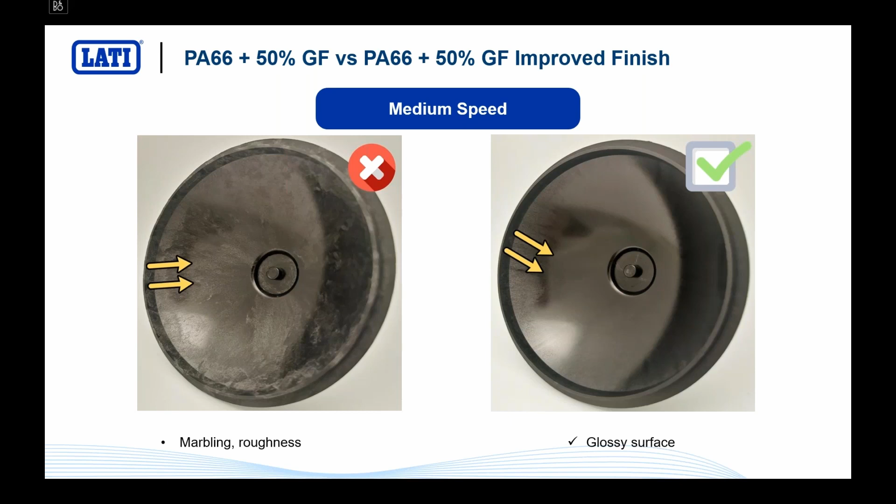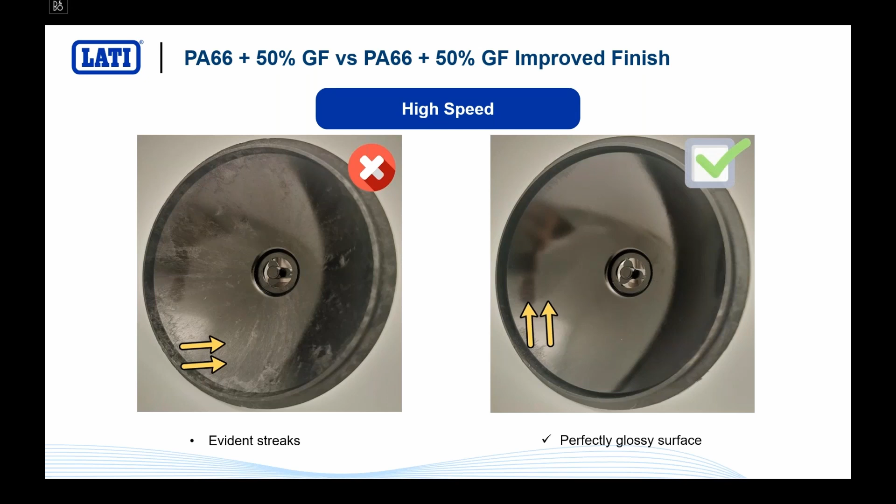What happens with high speed? You see it here. The standard grade is always bad looking, always poor looking. There is no way to improve this typical formula, but the improved finish formula, which is tuned in the matrix part, is absolutely glossy and very good looking. Not only with the three gates, but also with the fan gate, as you see here.

Also in this case, you have much better performance from a surface finish point of view, even with the fan gate. So the conclusion of this part of our design of experiment is that with some formulas, there is no way to improve it just by tuning the speed. You have to somehow tune the formula of the material as well, as in this case.

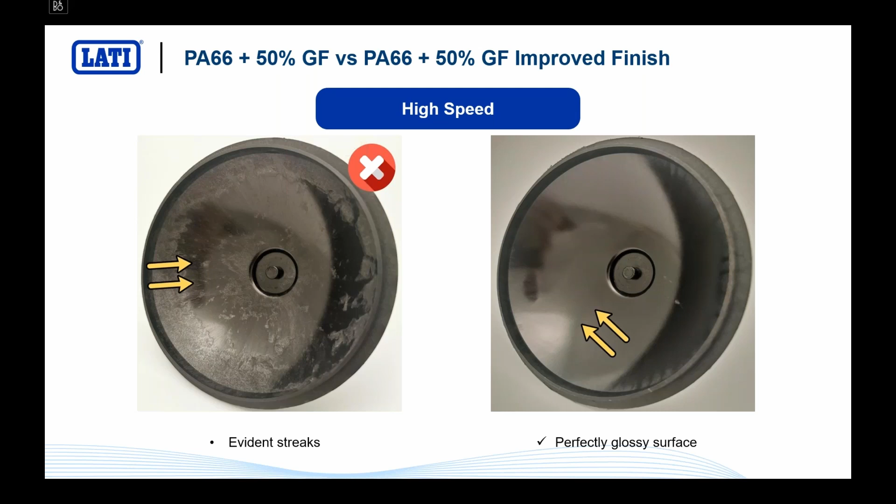Now we are at the end of our webinar. We are going to talk about what happens with amorphous plastics. First of all, we have to focus on the main difference between amorphous and semi-crystalline plastics, not only from the morphological, but also the thermal point of view.

The semi-crystalline plastics have a glass transition temperature range set by the formula of the polymer itself. We must keep an eye on this glass transition temperature because we want to set the mold temperature of our tool 10, 20, 30 degrees above this temperature, if we want a very good looking part.

What happens with amorphous plastics? Amorphous plastics have a much narrower glass transition temperature, and we want to stay as close as possible to this temperature. It is recommended to stay 20 to 30 degrees C above when it comes to semi-crystalline, but it is recommended to stay more or less close to the glass transition temperature for amorphous plastics, for the reason we are going to find out right now.

The point is that polycarbonate is not normally molded at 150, it's molded at 100 something. Let's see it with our design of experiment.

So we picked up a polycarbonate, 30% glass fiber filled, and we wanted to inject it at medium speed and then moving the speed, but with two different temperatures, 40 degrees C and 100 degrees C.

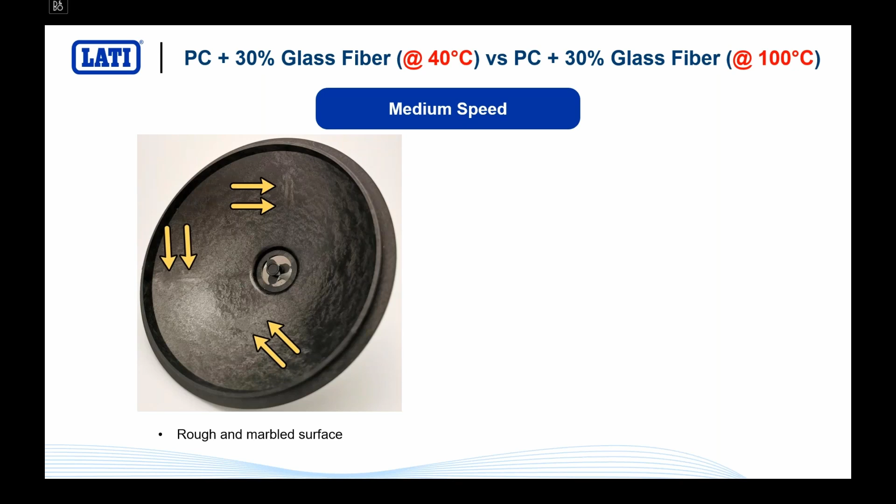For the picture on your left, 40 degrees C tool temperature, you still have a poor looking part, evident weld lines, very rough surface, totally not acceptable. But you can really appreciate an impressive improvement on the part molded with 100 degrees C. You put more energy in the tool and in the melt.

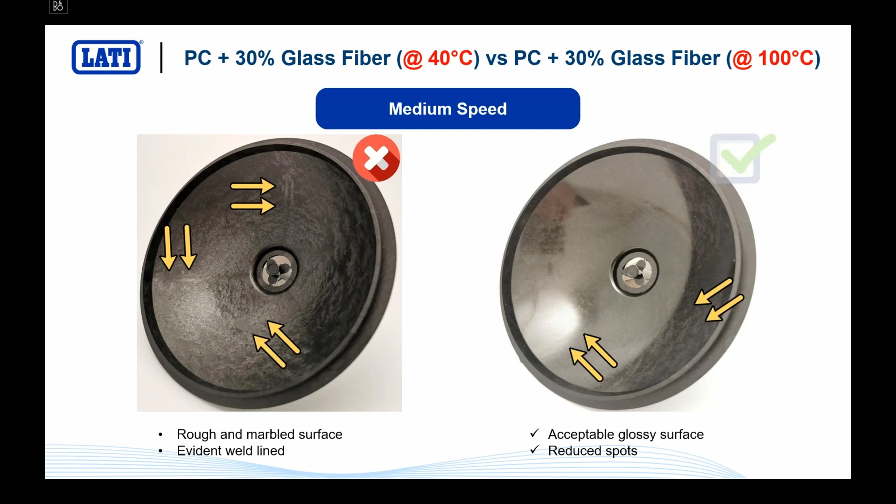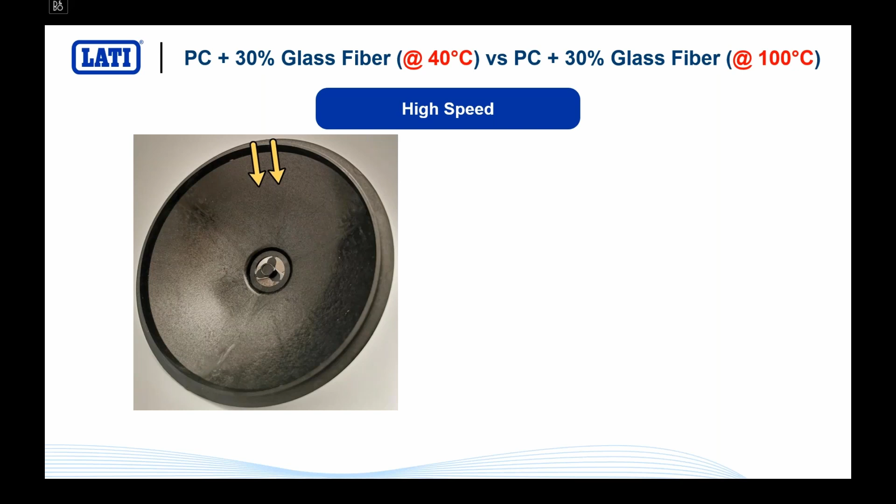And we will see what happened with high speed. You will see definite improvement. With high speed, you always have a poor looking part if you keep the temperature of your tool too low, but the surface finish of your part will be almost perfect if you use high speed and high temperature.

I strongly recommend keeping high temperature when it comes to amorphous plastics, even semi-crystalline plastics, but amorphous are extremely sensitive to the tool temperature, because if you keep a low temperature of your tool with polycarbonate, you will promote the impact resistance of plastic, but you can somehow mold some stresses in. It's something that should be avoided. Always rely on the instructions that you can see on our technical data sheet.

So, all in all, this was the end of our webinar. We have to somehow wrap up all the topics that we have been discussing and what we have seen right now. We have seen a design of experiment.

We picked up a few different formulas. We tried to differentiate the formulas in itself, then the molding conditions, the tool setup, the injection speed, and the tool temperature. And we saw how different can be the effect of each one of these parameters on the result of the surface finish.

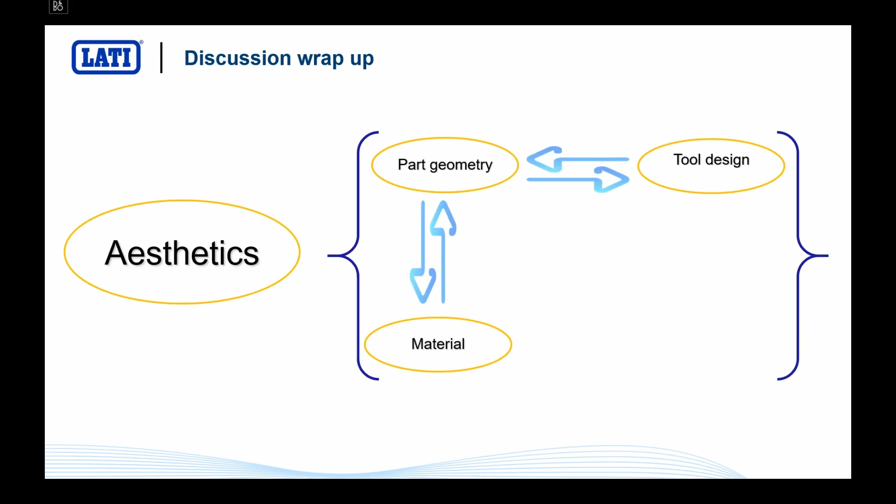Of course, you have to pay attention to the molding parameters. We have been discussing this during our webinar. Molding parameters play a major role: mold temperature, barrel temperature, injection speed, but also the packing pressure and packing time. These can all provide their contribution to the quality of the surface finish. So there is a very strong relationship between all these parameters, and you have to look for a good compromise.

My personal recommendation is, of course, to always get in touch with your material supplier, who will be able to give you the best suggestions, also to solve not only surface finish issues, but to find this compromise, which can be actually very tricky, especially when you have a very complicated part with some cooling difficulties on the tool, promoting glossy spots here and there, or some kind of distortion. Rely on your supplier.

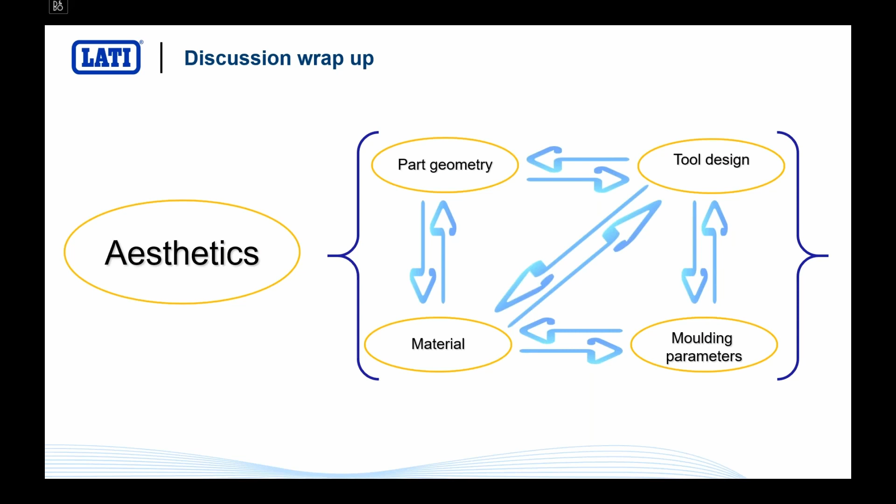Suppliers normally will provide plenty of technical skills and know-how to help you reach the best compromise. I really hope I was able to give you a decent introduction to this design of experiment, which was more fun than the normal theory of plastics. I really hope you will enjoy also the other webinars that LATI is going to offer. The next one will be about sustainability and circular economy, but not from an orthodox point of view, we'll try to be a little bit groundbreaking on this very relevant topic. So I thank you, and I will welcome your questions, if any. Just put them in the chat box, and I will be happy to answer within a couple of minutes.

The first question is about any chance to simulate this with finite element analysis and computer simulation in general. Finite element analysis has become extremely reliable, complicated, and skilled, also in detecting non-physical related aspects like aesthetics. The software you find on the market will tell you where the weld lines are, a bit more about the quality of the weld line, and about sink marks, but you cannot have a really reliable forecast of how your part will look, because it's more related to the experience of the tool maker and the material producer. So use simulation to detect sink mark issues, but then you need some trial and error, some design of experiment, to have a proper solution.